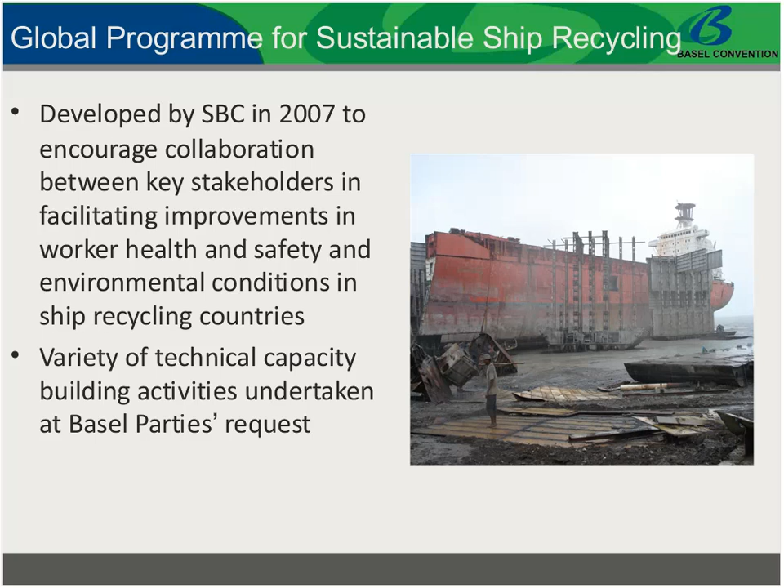Now, I'm just going to talk about two of these technical capacity building activities today because I want to make sure that we have plenty of time for our main presenter. Basically, the current feasibility study is one of two studies that was commissioned by the European Commission 2 years ago. The first study was a case study looking at models of compliant facilities, but this was specifically in a beaching context. So really what we tried to do there was to take a pragmatic approach to this issue, to recognize that there would be beaching for the foreseeable future, that was the predominant method for recycling ships. But how could we potentially make beaching safer and more environmentally sound?

So this case study was developed outlining improvements that should happen at beaching recycling facilities within the short, medium and longer term to upgrade standards. It really complemented the Basel Convention technical guidelines that had been developed 10 years before. On the basis of this case study, we also developed some guidance and training materials which are being offered to facilities in Bangladesh and Pakistan so that they can train not only the workers at beaching facilities but also the competent authorities who assume the regulatory oversight of the industry.

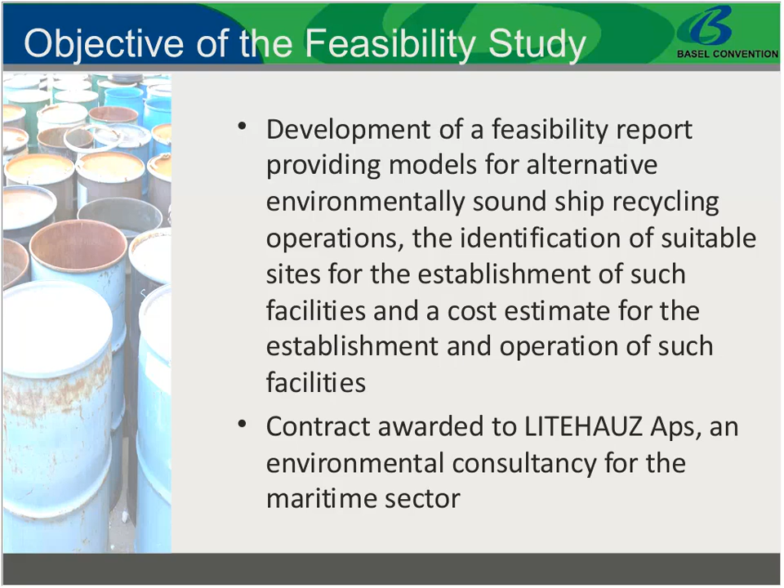Now, the second study that we're actually going to hear about today is a feasibility study, looking beyond what is the current reality and to a future reality which would look towards alternative methods to the beaching method. And it's thought that by employing alternative methods such as pier breaking, otherwise known as alongside breaking, or slipway breaking or the landing method, we would be able to exercise better control over and ensure environmental compliance, and of course also going hand in hand with that is worker health and safety. We did tender for this contract last year, and it was awarded to a Danish environmental consultancy that focuses on the maritime industry, and this consultancy is Litehauz.

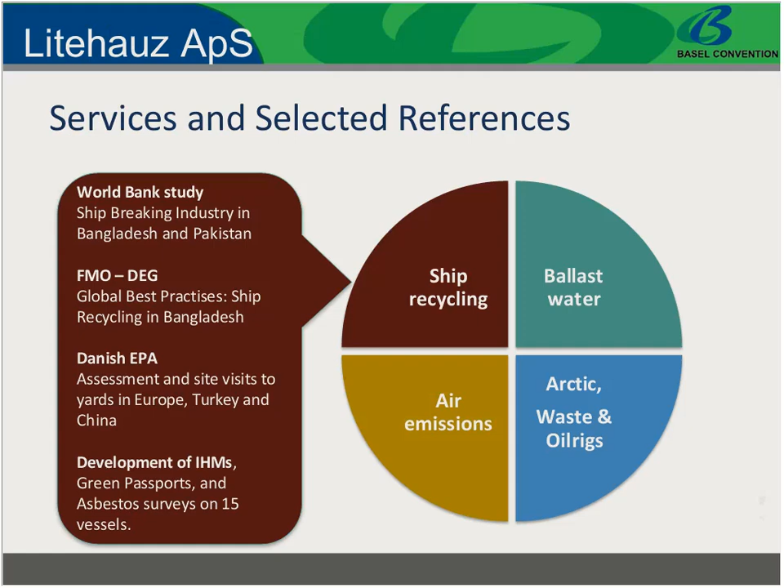Just briefly to introduce you to ship recycling, I know probably most of you know it, but just to highlight the 4 key methods applied today, and that is pier breaking, where the ship is berthed at a pier, and you dismantle the ship as a top-down process with highly mechanized facilities. These are the ones we find in China and the Western countries. We have the landing slipway methodology. This is also a top-down process. However, the ship is sailed onto a hard landing. This is the method we see applied in, for instance, Turkey.

Other Western countries do use dry docks as well. This is basically you sail the ship into a dry dock in full supports, and you can dismantle the ships in a confined area with minimal risk of discharges to the environment.

Finally, we have the beaching method, which uses the tidal range to sail the ship onto the shore. This is a less mechanized way of dismantling ships, and the ship is dismantled from bow to stern. This is the method we see applied in Asia, in the beaching countries of India, Bangladesh, and Pakistan.

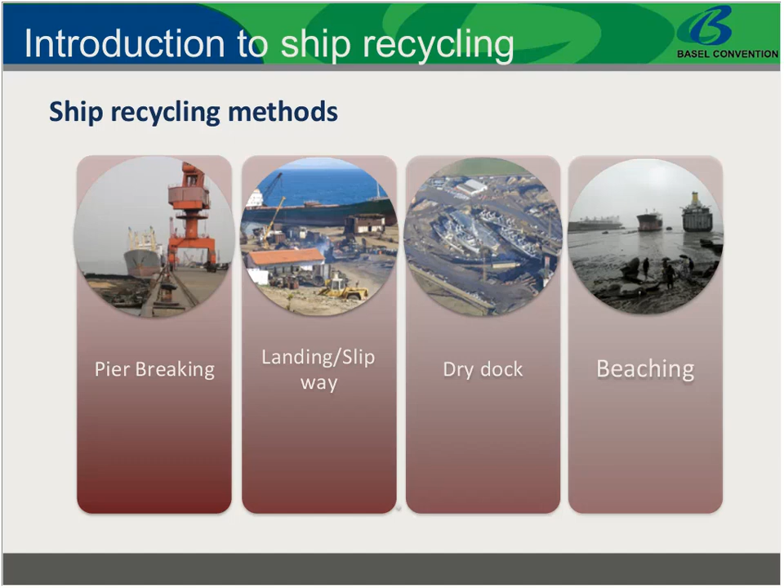The top 5 recycling nations in 2011 constituted 98% of the world totals, and these are comprised of the beaching nations, India, Bangladesh, and Pakistan, and China as a pier breaking nation, and Turkey using the slipways.

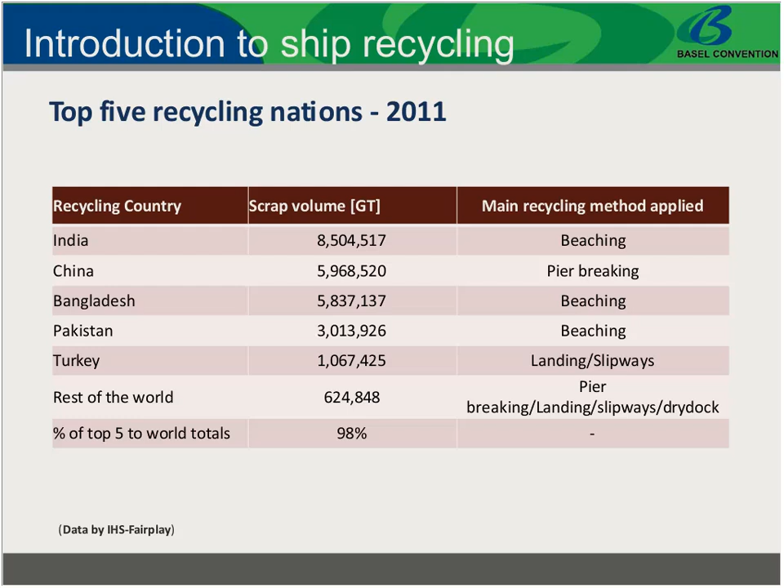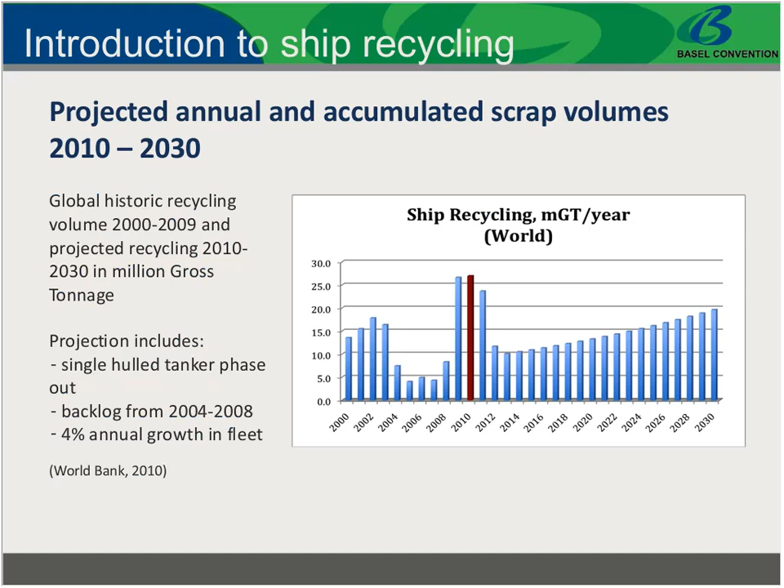I've included this slide just briefly to give you an idea of the scrap volumes that we talk about here. And I know this is old data, but it still gives an indication of what we can expect. And we can see from this figure that somewhere between 10 million gross tonnage a year to 20 million gross tonnage a year we can expect until 2030, and it just continues.

And this area is, of course, of interest due to the key impacts that we see in this industry, and especially within the occupational health and safety areas. We see a lot of worker fatalities, injuries, health-related issues from exposure to hazardous materials. Also, of course, the environmental degradation and contamination by hazardous materials of the surroundings.

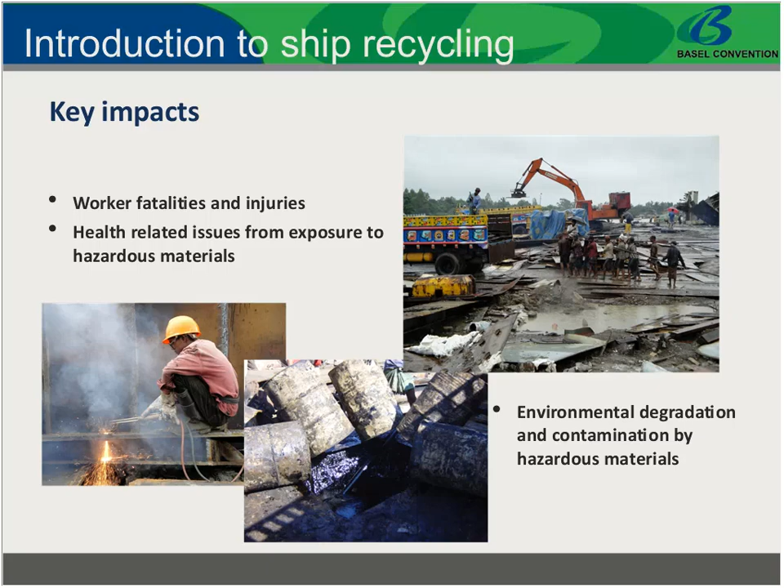Well, the main regulatory driver for greening of the industry is, of course, the Hong Kong International Convention for the Safe and Environmentally Sound Recycling of Ships. There's a host of multilateral agreements, in specific the Basel Convention, the Ban Amendment, also the Stockholm Convention and the Montreal Protocol. There's also a number of ILO agreements on workers' rights and occupational safety and health conditions.

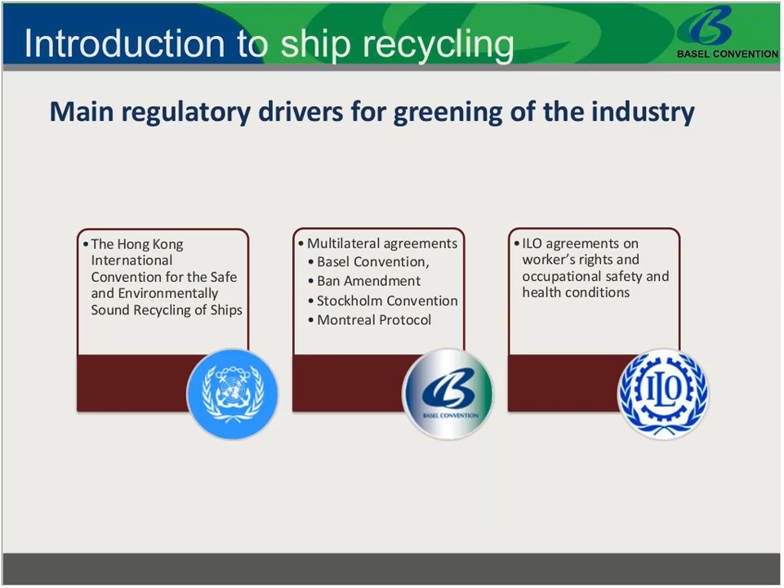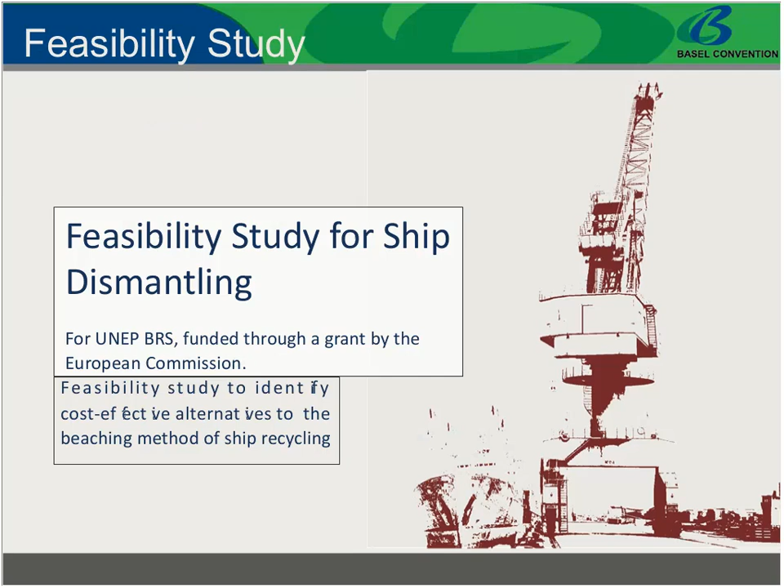To get to the crux of the matter, the feasibility study was made to identify a cost-effective alternative to the beaching method of ship recycling. And the approach of the study was to first identify the components an environmentally sound management facility was constituted of. Secondly, we estimated the current facilities which are operating and saw the level of environmentally sound management and what kind of upgrade they would need to reach the level of a model facility.

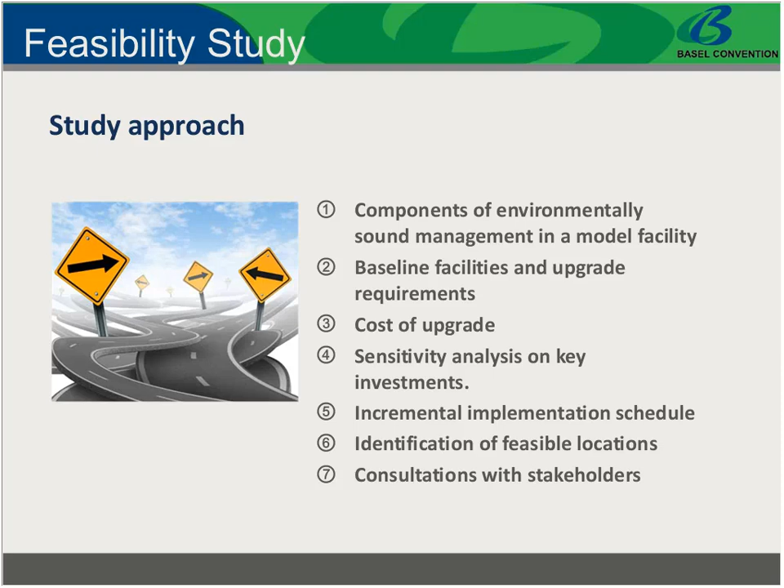Thirdly, we did an evaluation of the cost of such an upgrade and a sensitivity analysis of the investments. And then we looked into an incremental implementation schedule and tried to identify feasible locations for model facilities. During the course of the study, we also did consultations with stakeholders such as ship owners and ship recycling yards which do apply environmentally sound management.

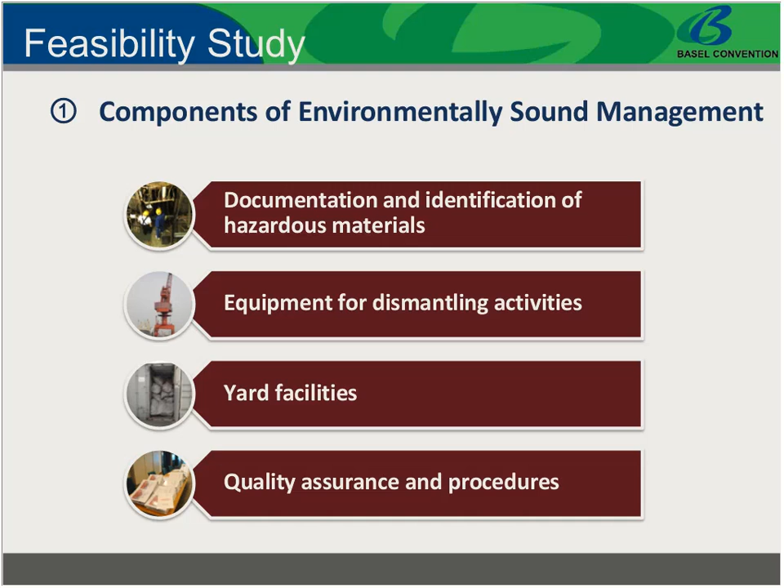So, for the components of the environmentally sound management, we basically used the Hong Kong Convention Facility Guideline and the Basel Convention's Technical Guideline on ship dismantling, and we divided the elements of the components into 4 key areas. The first area was documentation and identification of hazardous materials. This is a pre-cutting phase. For the cutting phase, there's all the equipment for dismantling activities. And then there's the yard facilities. And finally the quality assurance and procedures.

The documentation and identification of hazardous materials basically comprises the inventory of hazardous materials, i.e. to identify which hazardous materials are on board the ship. You cannot expect ships today to actually carry an inventory, but this area constitutes work needed to be done to identify that. It's also analysis of materials if one is unsure of what's on board.

For the second area, equipment for dismantling activities. These comprise all the equipment to ensure proper handling of hazardous materials, that is personal protection equipment and so forth, and heavy machinery, light equipment, all the equipment that is needed to dismantle the ship. The third area, yard infrastructure and equipment, is basically containment installations, impermeable floorings for hazardous materials handling, storage facilities, buildings, spill response equipment, and so forth.

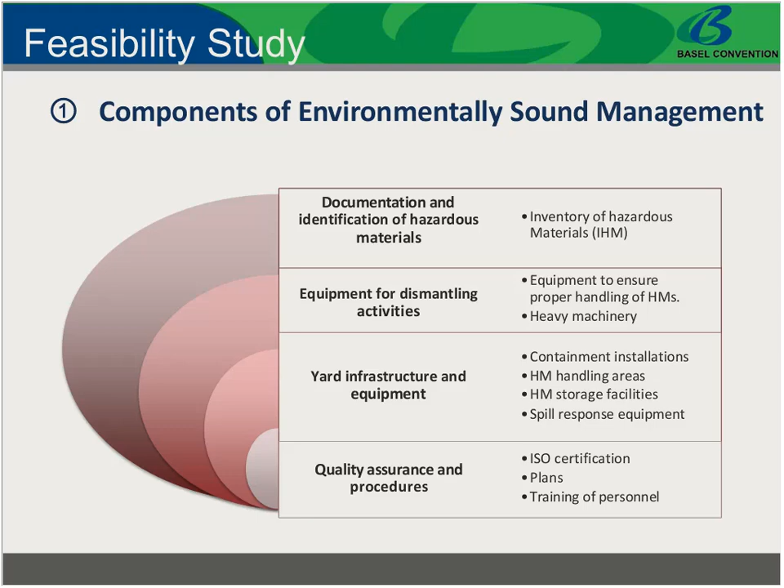The last area was quality assurance and procedures, and these comprise ISO certifications and plans. That could be the ship recycling management plan. That could be the specific ship recycling plan. There's the training of personnel, capacity building schemes, and so forth. So, based on the components, we developed a model facility which comprised differentiating levels of the different components.

We then assessed the current level of applied equipment, procedures, available infrastructure for pier breaking and slipway facilities, and did an estimate of what upgrade level was needed.

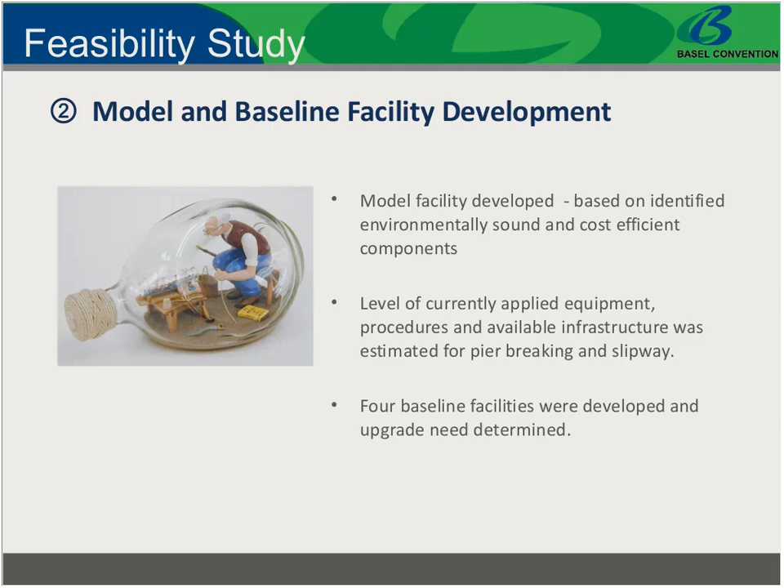One is the basic pier, which is to be used for the establishment of pier breaking from scratch. And then there's the basic harbor area, which is used for the establishment of a landing slipway facility. For these baseline facilities, we estimated 3 different sizes: 25,000, 50,000 and 100,000 light displacement tonnage capacity. The 100,000 light displacement tonnage facility we did to be able to assess a facility that could dismantle 2 ships at the same time.

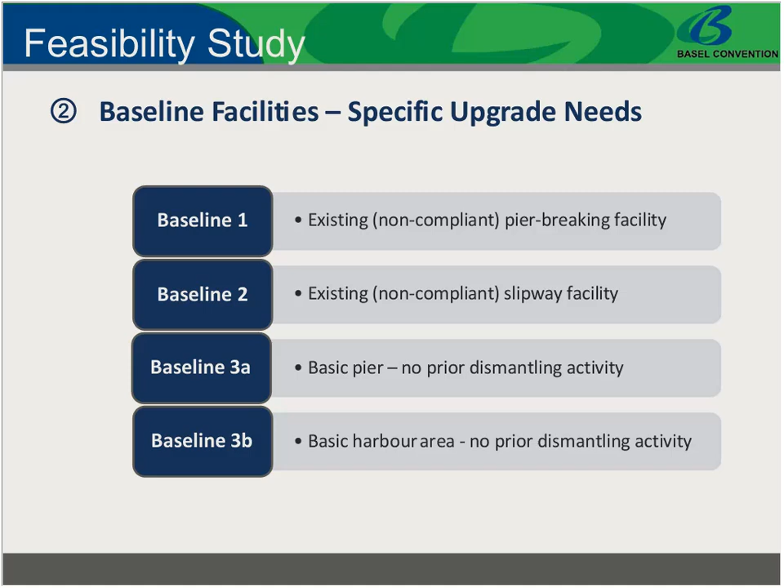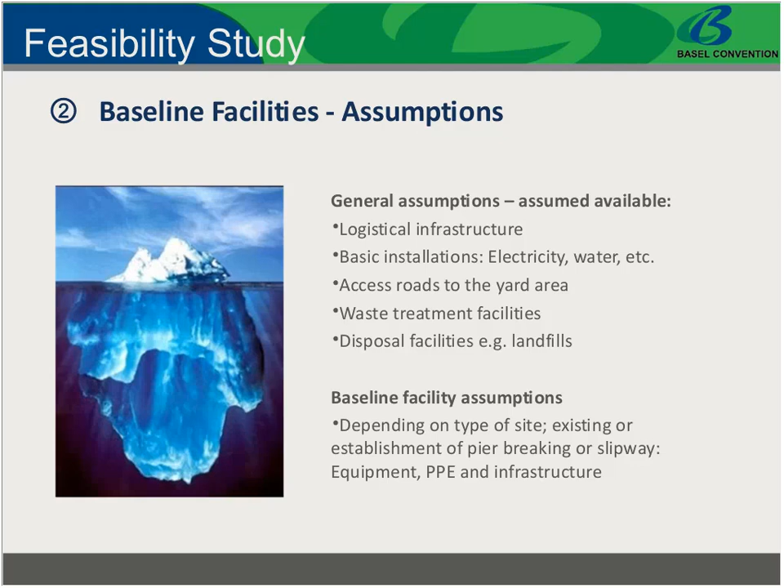There's also a range of specific assumptions associated with the baselines. For the existing pier breaking facility, a certain upgrade demand was estimated, and a different one for the slipway facility, and these are associated with the level of equipment needed for an upgrade, personal protection equipment, infrastructure, and so forth.

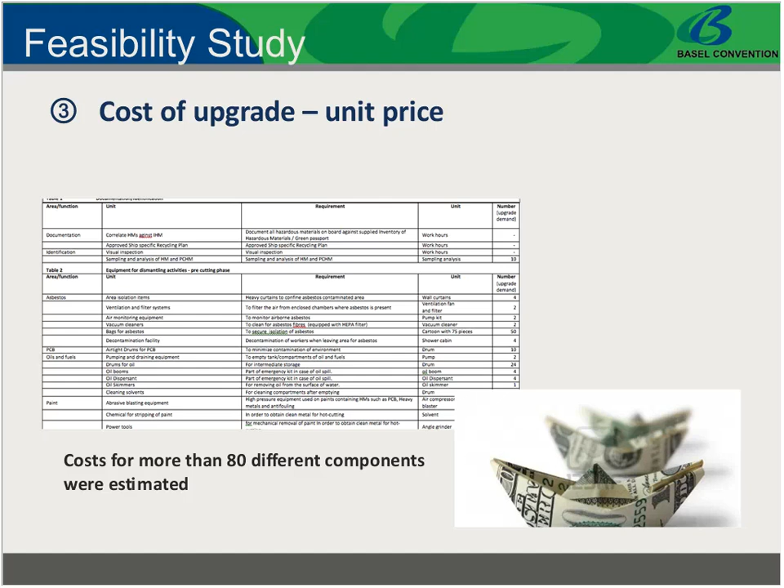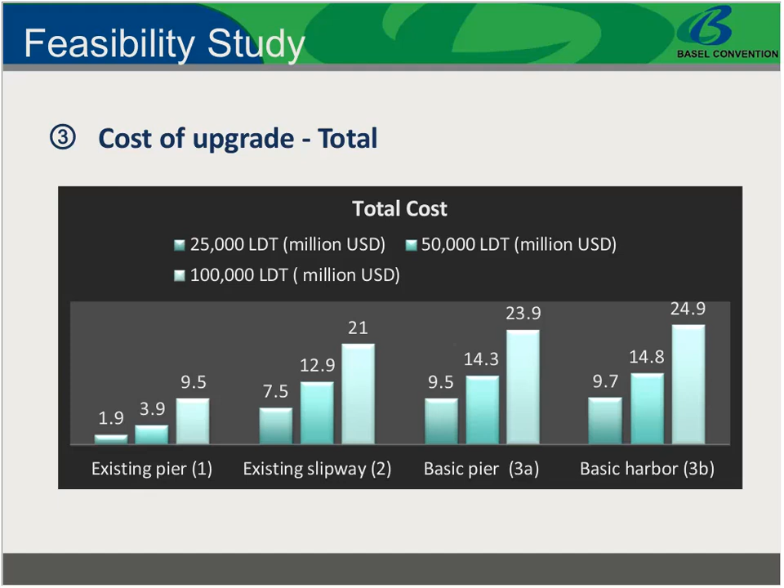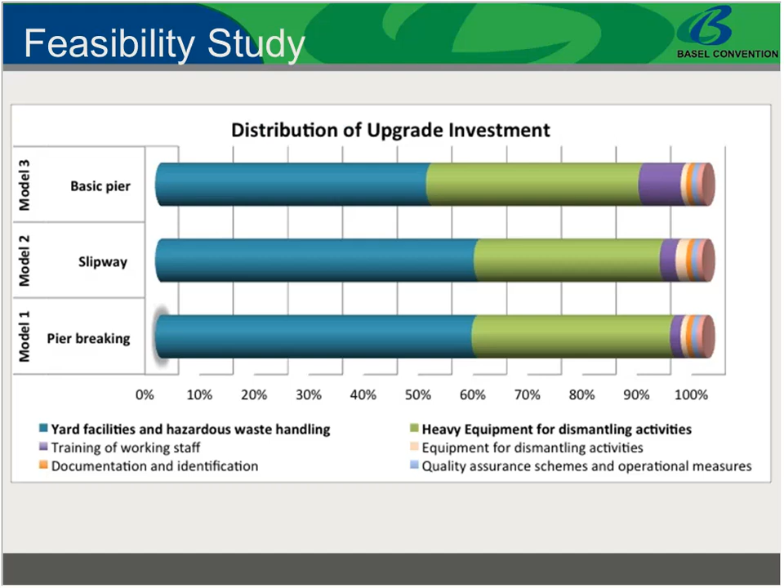When we look into the distribution of the upgrades across different components, we can see that the majority of the investments are in yard facilities and hazardous waste handling, as well as in heavy equipment for dismantling activities. These are more or less the same for all the baseline facilities, and the rest of the areas, quality assurance schemes, training, documentation, and so forth, comprise less than 10% of the total cost of upgrade or establishment.

We also looked into how that would look on a time horizon where we had an incremental implementation schedule of different components, and we used the case study which was done by...

Sven, can you hear me? Yes. We're having the same issue as the other day, starting on the same slide. I don't know why. That's very strange. Would you mind starting again, at least on that slide, your explanation, because your voice has been cut a few times. Okay, just on this slide, or do you want me to back up one slide? Just this slide, I guess. Okay. Thank you. You're welcome. I hope the sound is okay now.

We also looked into an implementation schedule on a 7-year time horizon, using a step-by-step methodology. Basically, we used the method applied by Roy Watkinson in the case study, which builds on the Basel Convention technical guidelines. The first step is short term, up to 1 year, where all the minimal equipment requirements are met. The second step is medium term, within 1 to 3 years, where all the simple and low cost techniques are implemented. And finally, there's long term, 3 to 7 years, where all the infrastructure is improved and the heavy machinery is included.

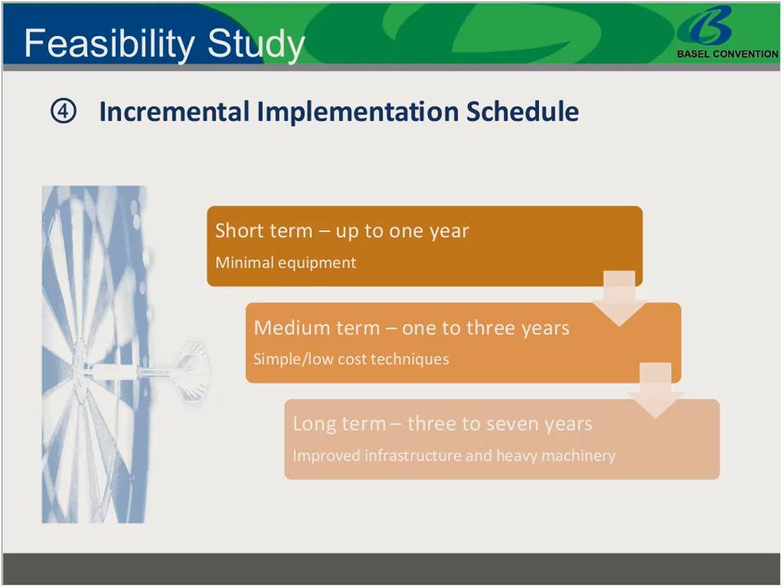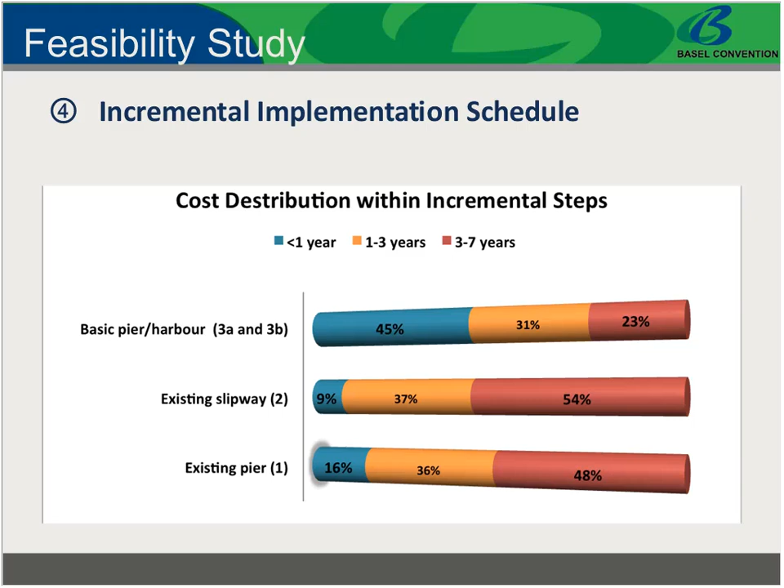What we could see is that for the existing pier and the existing slipway, there's not much investment needed within the first year, and this doesn't comprise much of the total cost. This is situated mainly in the second and third step. It is the other way around for the basic pier and harbour, which need to establish a facility from scratch, and this is the reason why we see main investments needed within the first year, because they have no prior dismantling operation at these sites.

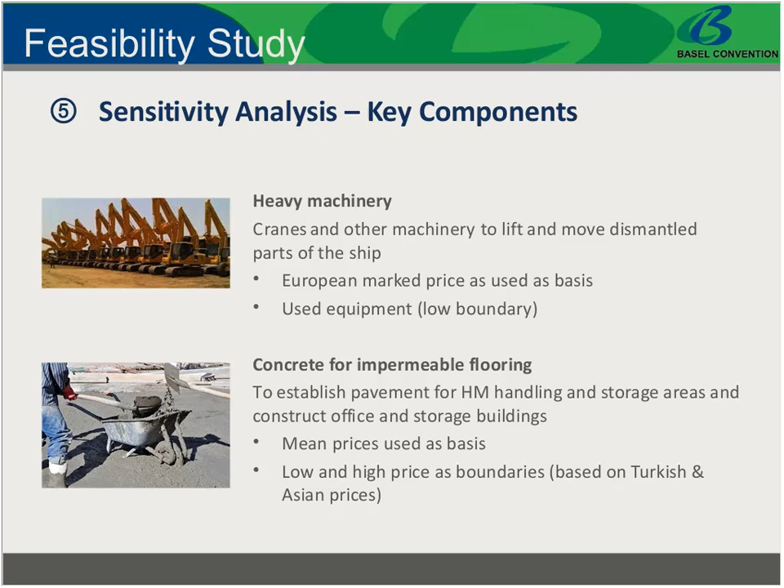The other element is all the yard infrastructure. That's more or less the concrete needed for the impermeable flooring, but also to construct offices and storage buildings. Originally, we used mean prices as a basis, and for the sensitivity analysis, we used the low and high price as boundaries, and these we found on a long range of countries in Asia and Turkey.

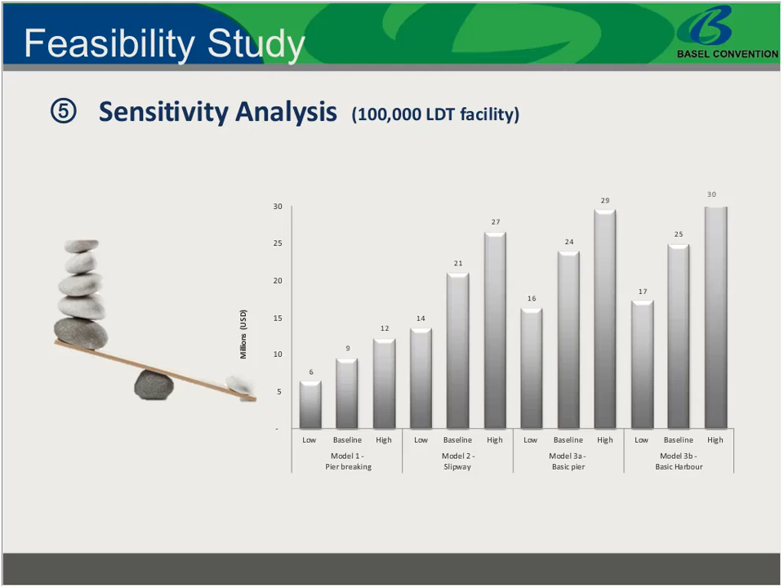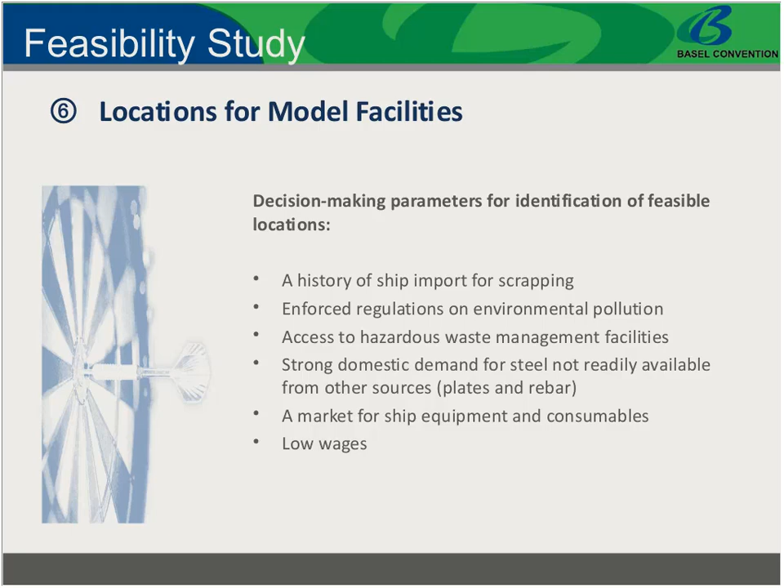And for the establishment of pier breaking or a slipway facility from a basic pier and harbor area with no prior operation, that could basically be any port infrastructure or ship repair yard. And countries of interest could be Philippines, Indonesia, Vietnam, Thailand, and the beaching nations, Pakistan, Bangladesh, and India.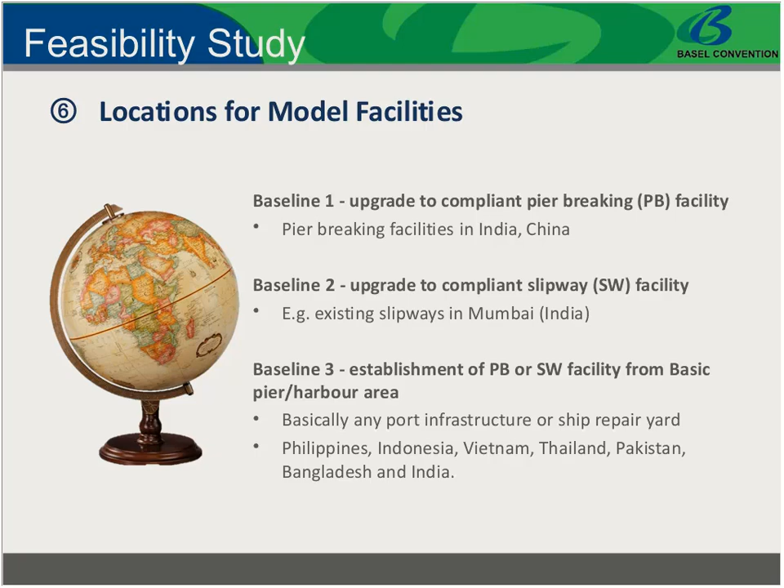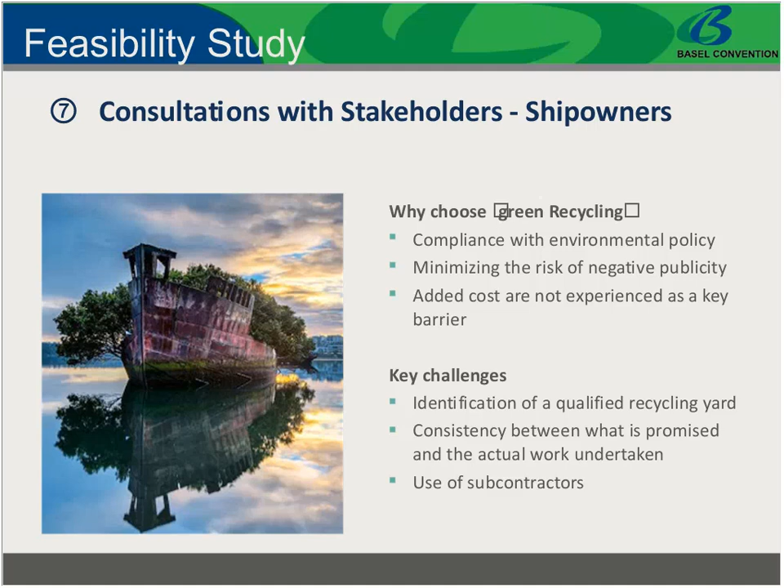A part of the study was also to conduct a field mission, and we were invited to China. And in China, beaching is not allowed. It's primarily pier breaking which is conducted, and ship recycling is an area that is regulated and enforced. And it's one of the most developed countries with regards to environmentally sound recycling of ships when you look outside the Western countries.

And they explained to us that they were actually considering to get on the EU list of compliant facilities, and they highlighted some of the future plans and upgrade requirements for them to come into consideration, such as upgrade of the hazardous material segregation areas. They needed a bit more on the capacity building, and needed to upgrade a bit on the heavy machinery as well.